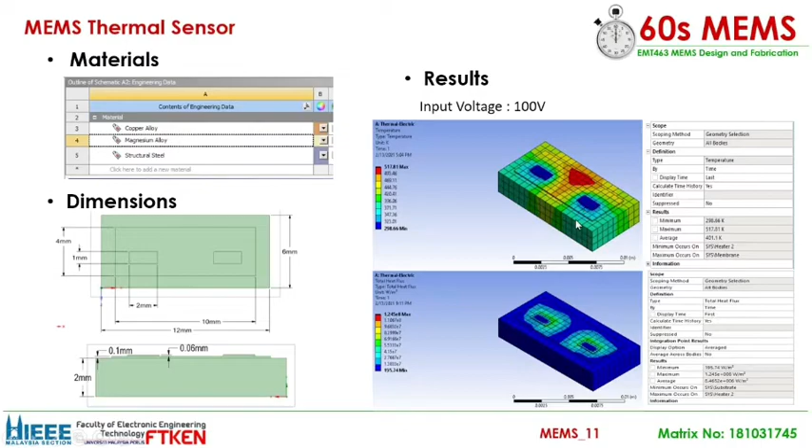On the mechanical ANSYS, the voltage is 100 volts, so the temperature can reach 517.81 Kelvin and 1.245 times 10 power of 8 watt per meter square is the total heat flux. However, when the voltage is changed to 0.1 volt, the temperature is only 300.01 K while the total heat flux is 4995.1 W per m square.

So the higher the voltage, the higher the temperature and the total heat flux, and vice versa. Since the sensor has maximum temperature around 2 heaters, the sensor will reach thermal equilibrium state. As a conclusion, the smaller size of heaters has high sensitivity and can reach temperature up to 600 K. Thus, the temperature of the heaters changes when the dimensions and voltage are different.

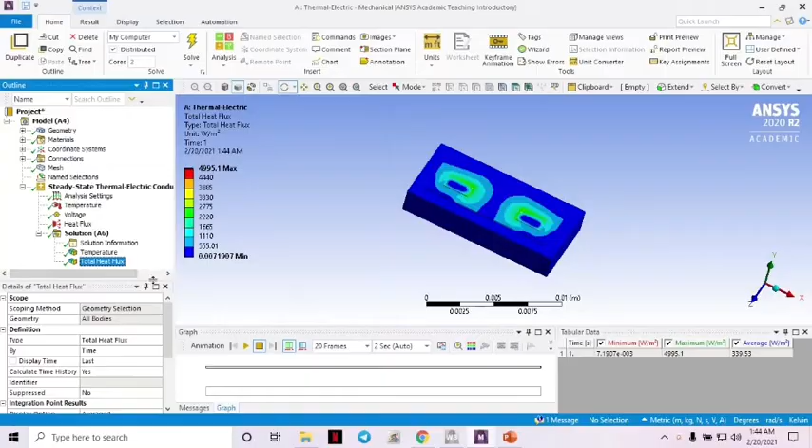I will present the result from the simulation of the RF MEMS power sensor. The materials used for the design are gallium arsenide as a substrate, gold as a MEMS membrane and tantalum nitride as the heater. The input for the simulation is a power with a value of 200 mW while the outputs are temperature and electric voltage.

Figure 1 shows the distribution of the temperature field under 200 mW input power level and the result for power versus temperature. Figure 2 shows the DC output voltage under 200 mW input power level and the result for power versus voltage. As can be observed from the result in Figure 1, the temperature is mainly distributed around the two symmetrical terminal RF fitting resistors.

The highest temperature around the resistor is approximately 344.45 Kelvin. As the size of the terminal resistor increases, the temperature produced by the RF filter gradually decreases for the given power. The experimental finding in Figure 2 shows that the performance of this design has excellent RF DC linearity with a power of 200 mW. Furthermore, as the dimension of the terminal resistor increases, the corresponding output response and sensitivity are gradually decreased.

I'm from MEMS 11. I have designed the electromagnetic thermal electric of an indirectly heated RF MEMS power sensor using ANSYS 2020 R2 Academic Teaching Introductory. From this slide, we can see the result, the dimension, the input, the output, and the materials. In this model, there are 6 parts, which are geometry, material, coordinate system, connection, mesh, and input-output.

For geometry, there are 3 types: substrate, MEMS membrane, and heater. For materials, there are 3 types: copper alloy for the substrate, aluminum alloy for the MEMS membrane, and structural steel for the heater. Next, for input and output, the input has 3 types: temperature, heat flow, and voltage, while the output has 2 types, total heat flux and temperature.

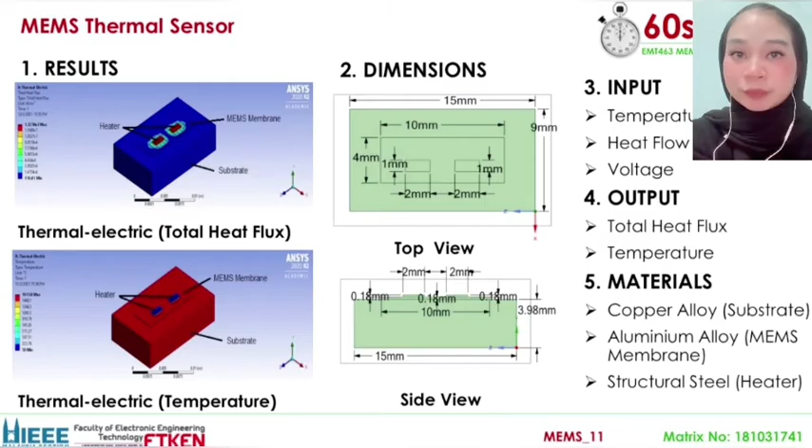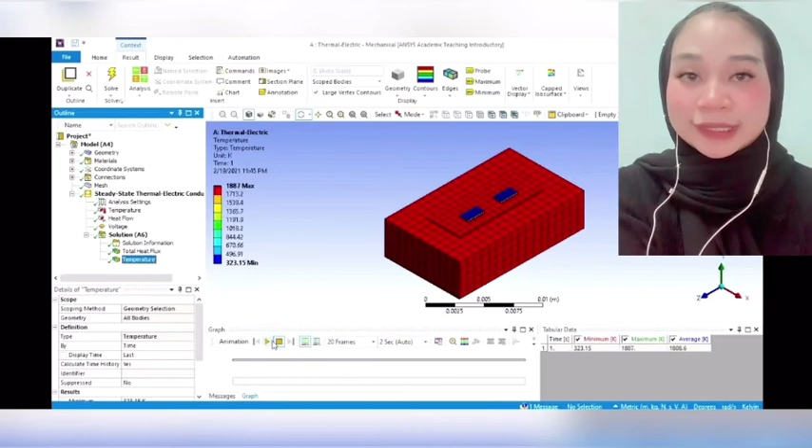The first figure is about the thermal electric of total heat flux. The minimum is 116.81 watt occurring on the substrate, and the maximum is 1.3278 times 10 power of 7 watt occurring on the MEMS membrane. The next figure is the thermal electric of temperature. The minimum is 50 Celsius occurring on the heater and the maximum is 1613.8 Celsius occurring on the MEMS membrane.

This slide is about MEMS thermal sensors in the fight against COVID-19. In the fight against COVID-19, various technologies gain traction, each one driven by a specific application or need. One example of application is the early detection of possible COVID-19 symptoms, among which is a fever. The purpose is to isolate febrile people for safety reasons and then provide future diagnostic testing to verify if they have the virus or not.

For that reason, the thermal sensor is most important in the fight against COVID-19. It allows for fast, contactless screening of body temperature in various non-medical environments. Applications of RF MEMS technology focus on thermal sensors for basic temperature sensing detection or temperature imaging by microbolometers and thermopiles. That's all from us from MEMS 11 Thermal Sensor.